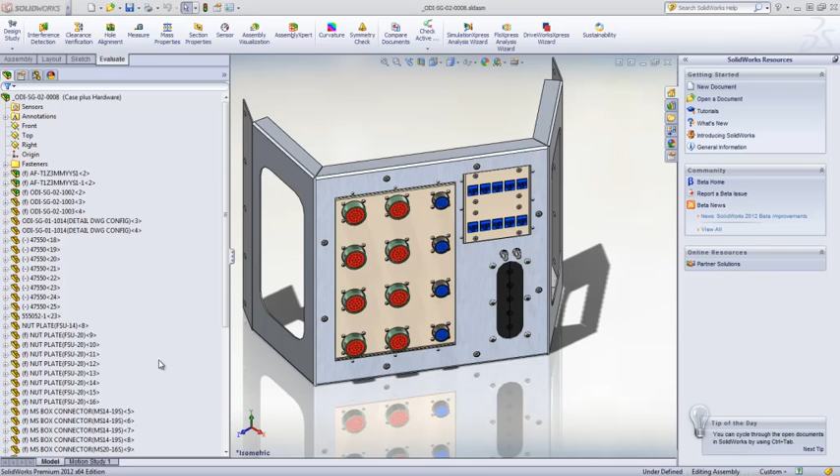Keeping any design project within budget is essential, especially from a manufacturing aspect. The challenge has been to obtain quotes or manually estimating costs in a big spreadsheet within a reasonable time frame. With the new costing tool in SOLIDWORKS 2012, you can eliminate these budget and time issues by quickly estimating the manufacturing costs of sheet metal or machine components.

Let's take a look at the sheet metal component to start with. Using detailed built-in templates that are easy to customize, SOLIDWORKS 2012 helps quickly calculate the manufacturing costs for parts made internally or using regular vendors. Since the tool is completely automated, you can evaluate different vendors, materials, or thicknesses and see the price update immediately.

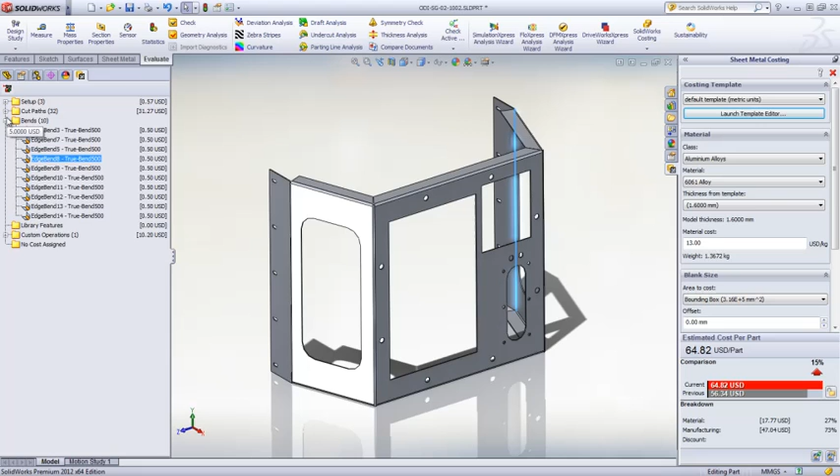The costing tool works by looking at the various part features and assigning these to specific manufacturing operations. For sheet metal, that means cuts, bends, and even custom tools or operations. You can drill down into great detail if desired for the cost of specific operations to see the time and cost associated with them. Custom operations can be automatically accounted for based on the template or manually applied as needed.

A key benefit of costing is being able to set a baseline to do fast what-if scenarios, like evaluating the impact on cost by adding lightening holes to increase stiffness on these side panels. The tool re-evaluates all the features and automatically updates the manufacturing operations. The tool costs for cut paths is reduced, and there are now 2 library forming operation features added for the lightening holes. It's a little cheaper since the forming operation takes less time than the cutting out of the holes.

Everything is automatically captured in a highly detailed report comparing your current concept to the baseline. So when you have to present costing in a design review, it's ready to go. It contains a high-level summary as well as detailed cost breakdowns of the initial and final design variations.

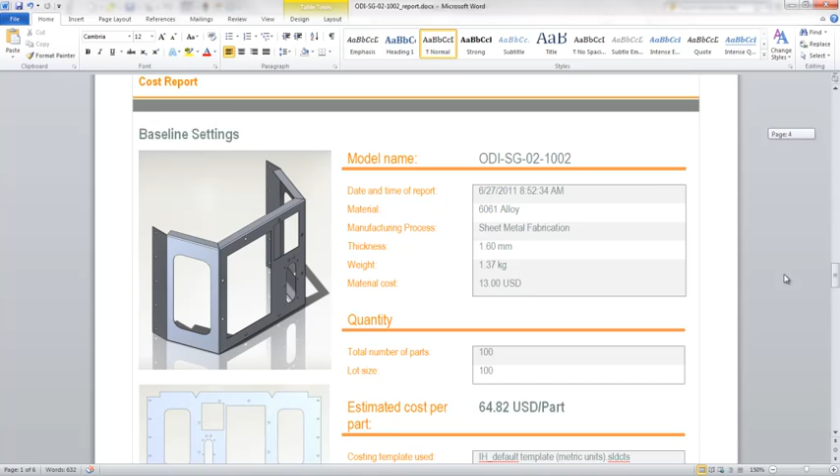The built-in template editor makes it incredibly easy to set up operation pricing. Simply define the available stock materials, as well as the cutting and forming tools, and anyone in the company can use it to estimate costs. Built-in filter lists make it easy to focus on a particular subset of materials or operations to add or modify values.

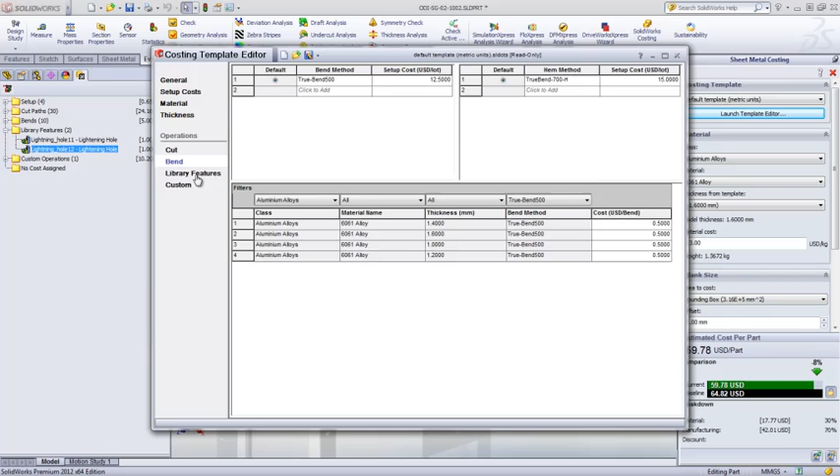In an assembly, the costs are rolled up, which makes it easy to evaluate manufactured items relative to purchased items, or identify which components contribute the most to the cost of the project.

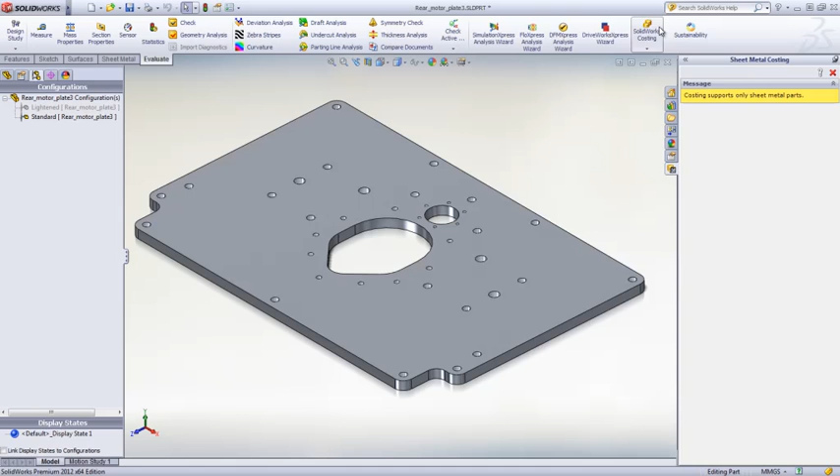Let's now take a look at a machined engine backplate. Costing automatically switches to a machine template and calculates the cost. You have the ability to choose if the part will be machined from a solid block of material or from stock plate. Part features are sorted into cutting, milling, and hole operations. Tooltips explain the calculations used for estimating cost and the time.

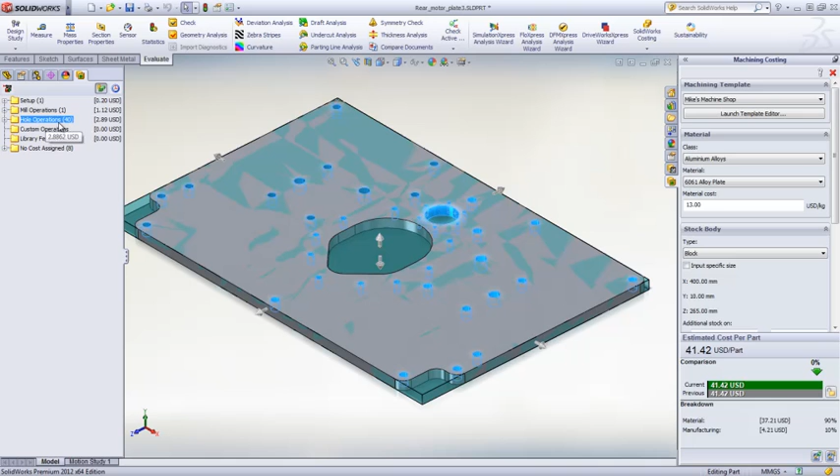There's even the ability to override the type and size of tool used for specific milling or hole operations if desired. As with sheet metal components, it's easy to compare design changes and immediately see the impact on cost. In this part, we want to evaluate the cost of reducing weight by machining additional pockets. Costing re-evaluates the manufacturing operations based on the required tool size, type, and cutting speed to remove the necessary material.